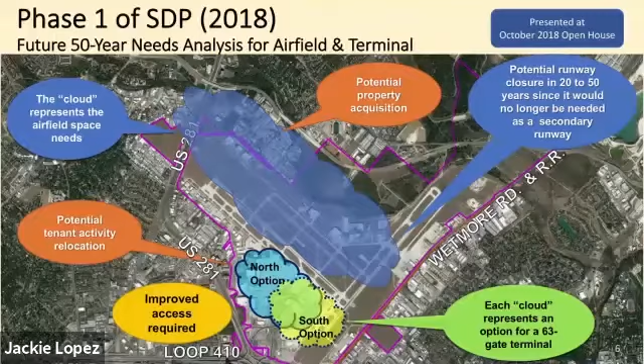And then in 2019, we said, okay, now let's focus on the existing airport and study it and see what do we need, what is reasonable, what is not exaggerated. So we call that phase two, because it was a contract amendment and it had a totally different focus. What's different about it is now we're looking at the most likely growth - this is a forecast scenario that FAA reviewed and approved. We also looked at a 20-year planning horizon, which is a little more foreseeable than 50 years, and also typical for airport master planning purposes. And instead of planning for facilities to come online early, we're looking at facilities when they're actually justified by demand, when they're needed. So those are some pretty dramatic changes.

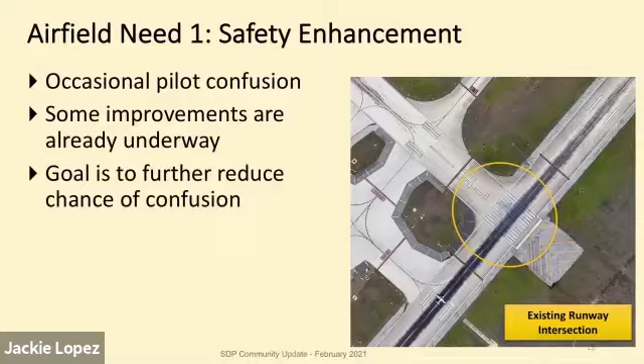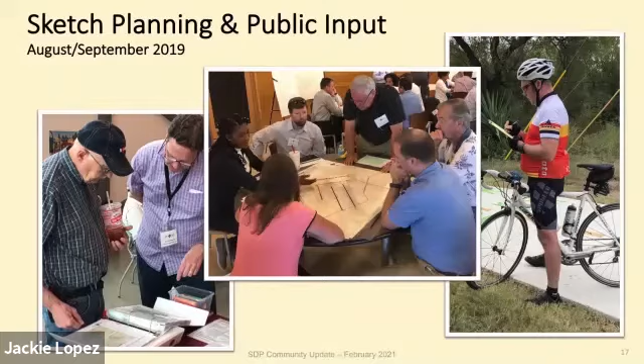For example, when something doesn't work at all, there's no need to figure out a cost estimate on it because it just won't work. We can eliminate it early on. So that's kind of the evolution of the process we went through.

On this next slide, you can see some of what we call fatal flaws, things used to eliminate alternatives early on before getting into more detail. For example, we're trying to make sure the airport can add capacity on the airfield or in the terminal area. If somebody drew up an alternative that reduced capacity or didn't add capacity, that wouldn't be useful. Also, if an alternative added runway intersections, that's not good from a capacity and safety perspective. FAA is very active in trying to eliminate runway intersections, not build new ones.

So these are some of the factors we used. I should mention another one: public parks. There were some folks who suggested runways entirely outside the existing property, in say a neighborhood or a nearby park. Those alternatives were flawed out in the early rounds.

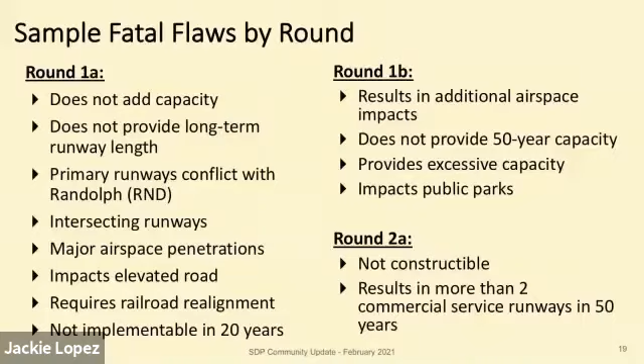On this next slide, you see a little bit more about some of these factors. Here's one we wanted to focus on. There were quite a few options suggested that took that crosswind runway 4-22, the northeast direction, and extended it, added a parallel, or otherwise made that the main direction of the airfield. The main direction today is the 13-31 direction you saw, which was more horizontal in most of our exhibits, and this would rotate it 90 degrees.

Why that's an issue is because of airspace. You'll see here in this arrow, we eliminated alternatives as we went. We actually had an exhibit that showed all the alternatives. It was hard to see because we had everything from runways off the property, as I mentioned, but also a circular runway in there, for example. So what you see here is from several rounds onward as we eliminated options. The options that rotated the entire airport in the northeast direction were eliminated.

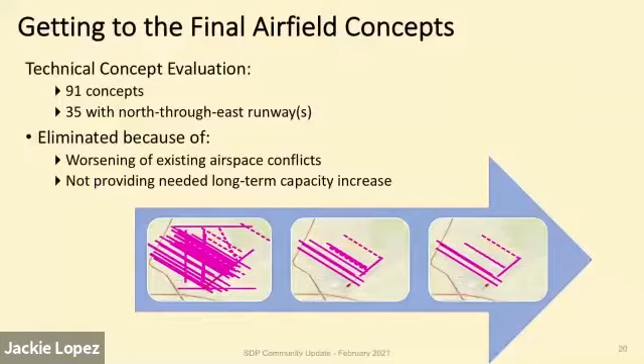And we know there's a lot of interest. People talked to us at the various open house events, pop-up open house events, and other meetings we had, and asked us why. So we really delved into that.

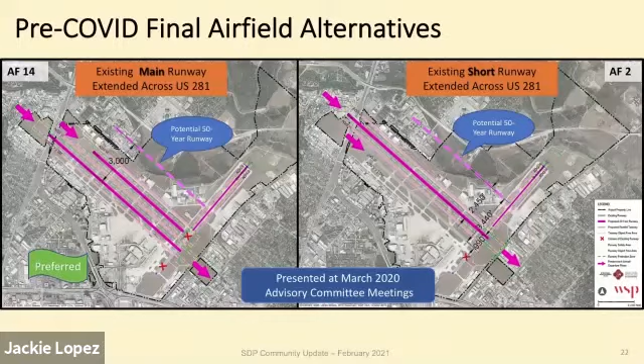So this is where we left off with you in March, and then of course COVID stopped everything. We were able to hold about four events, some pop-up open houses, coffee klatch meetings, and study advisory committee meetings. Then right before we were getting ready to go to our open house, everything came to a screeching halt. The whole study was paused in mid-March.

We restarted later in the year with the technical work, did a lot of rethinking and reassessing, and got underway again. That's why we have progress to report today.

The only other thing I want to mention about COVID is that we recognize aviation demand in the near term is, of course, dramatically different from what anybody would have thought a little more than a year ago. But we don't quite know yet what COVID's long-term impacts are. We know it may be different, but not exactly how. So for now, we're working with the existing forecast, and we realize it may be slightly high.

We'll reassess that in a few months and talk to the FAA about what to do. Do we stick with this forecast? Do we adjust it a few years but otherwise leave it be? Or do we rethink the entire outlook, redo the forecast, and tweak the planning to reflect that? We don't know yet, but we do know we may be slightly high with the forecast.

In planning terms, that's better than being low, because if demand is actually more aggressive than you thought, you're not ready for it. So we may be slightly high with our planning, and the things we're showing you may not be needed until a little later, but we'll know more in a few months when we reassess the forecast.

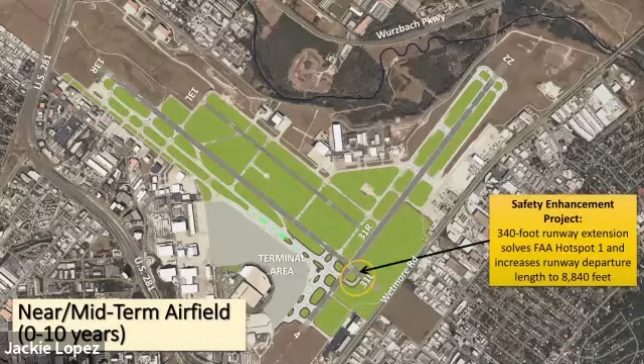It's been through a preliminary runway safety risk assessment, and this is one of the projects we're looking at. Looking a little farther out in the future, in the 10 to 20 year range, there are two projects. One is the biggest one here with the yellow oval. I'll just point out one other near the terminal area.

You see this angled taxiway coming off the runway towards where it says terminal area. That is a slightly reconfigured taxiway from what's there today. That should allow aircraft to get off the runway a little more quickly, which increases the runway's throughput, and that postpones the need for any other capacity improvements.

The bigger project, this one in the yellow oval, is a runway extension. It looks a little different from the one you saw in hot pink from where we left off in March, and the reason is that this fits nicely on the airport property. It's still an overall 10,000 foot long runway, which is what we showed you on that range chart for the aircraft going internationally.

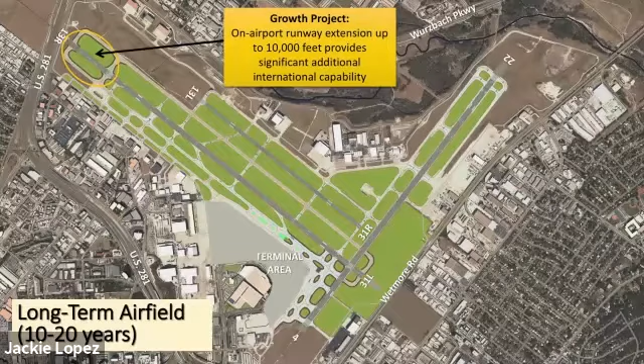And it very well gets you 10,000 feet on the property and doesn't interfere with 281. It's a big project, hard to see at this scale, so on this next slide we have a bit of a blow up of it.

I won't bore you with the engineering details, but suffice it to say that we did dig into this to understand the elevations there, any potential interference with 281, how close you can get to the edge there and have sufficient setbacks, and what that looks like. So what you see here is just a snapshot of some of that engineering detail.

Essentially, this would be on airport property. The runway would stop short of 281, and it would be at an elevation where, should in the 40 or 50 year time frame an extension be needed by future generations to go to future destinations with future airlines, you would have the option to extend it further if that were ever needed.

And of course, we've coordinated with TxDOT on this, and we've done quite a bit of engineering to understand what that would look like. But that's not part of the plan. This is part of the plan: that would be another 1,250 feet on this end. You saw the short extension on the other end. Together it makes for 10,000 feet.

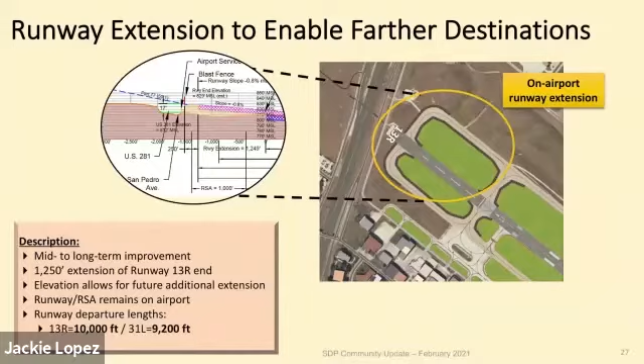So that was the airfield. We're not done with the terminals yet, but we did want to give you an update. So with terminals, let's also talk about the needs, the shortcomings a little bit.

On this slide, we did the same thing with terminals. There were lots of issues, and you can sort of combine them into three main categories. First, you have to accommodate passenger demand, and we deliberately looked at high growth demand, a little more aggressive than we actually think will happen. The reason for that is it's very disruptive to expand your terminal while it's in use.

That's just how it is at airports, so you try not to do that. You don't need to - that means you try to plan for a little more growth to make sure you're ready and that the things you build will last a while, so you don't have to come back a few years later and expand or redo things. That's why we looked at high growth demand.

We heard from many of you, we heard from the mayor's appointed Airport System Development Committee and others that a world-class customer experience is very important. That's what people want - Jesus has said that many times as well. That's what we're trying to accommodate.

The third need is about Terminal A. We also got comments about Terminal A. It's an older building, goes back to the 80s. It no longer meets the needs of today's aircraft and passengers. There's not enough space in it.

And also behind the wall, so to speak, are various systems like electrical and sewers and all that, which also are starting to reach the end of their useful life. So a major issue that we also knew we needed to fix.

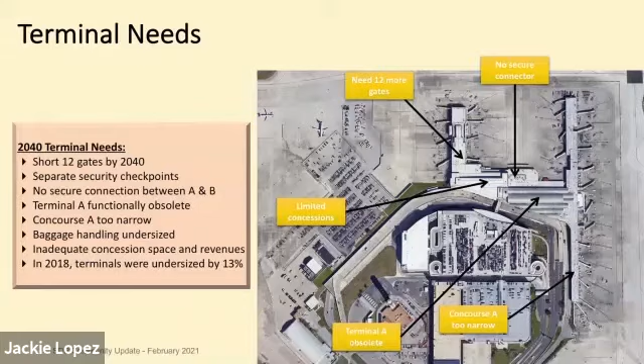When you look at today's planning standards and you were to provide this number of gates, you would build more space. You're undersized today already by about 13%. And of course, we're looking not at today, but at 2040. So when you look at 2040, we know that you need about 12 more gates and of course, more building square footage. On this next slide, these are clearly pre-COVID slides.

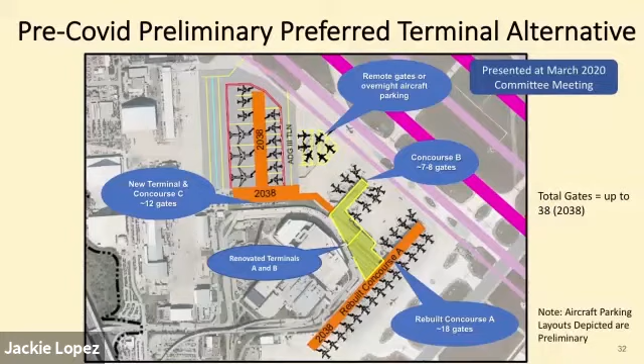So we're doing some more refinement now on, okay, what do we need? What does it look like? That general image, what exactly does the new terminal look like? This is some of the technical things we're doing. On the left there for reference, you see again, terminals A and B. And you can just see how narrow A is, especially on the southern part.

And what we're planning for, what we're trying to accommodate in all of our alternatives is a much more modern concourse width. The industry benchmark is 110 feet now for new concourses, quite a bit wider than what you have. If you have international service, that would widen it. So if you have international service on one side, it'd be about 120 feet. If you were to have gates and some alternatives on both sides of a concourse, it would need to be up to 140 feet wide. So quite a bit wider than what you have today. That's kind of some of the technical stuff we're doing.

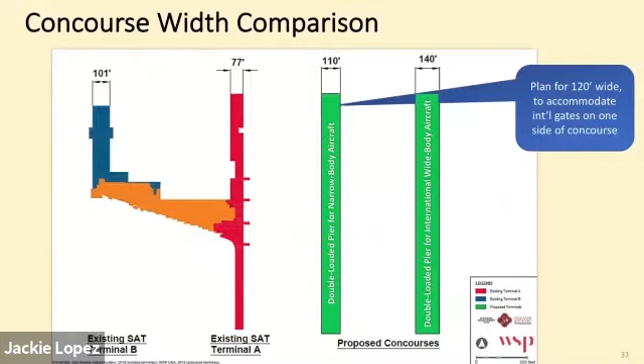We've seen a much stronger response than we normally see at airports. 3,600 people completed surveys that we did, and more than 700 people took the time to actually handwrite in additional comments.

We're continuing to collect this information, and that's one of our asks of you today. After this meeting, please go to the website, fill in what you'd like to see, send us a comment. We're continuing to collect this information, and that's all going into the terminal planning that's ongoing.

The current terminals, even a newer Terminal B, it's nice, but it's a little sterile. It's not really, doesn't really scream San Antonio. And people told us that loud and clear.

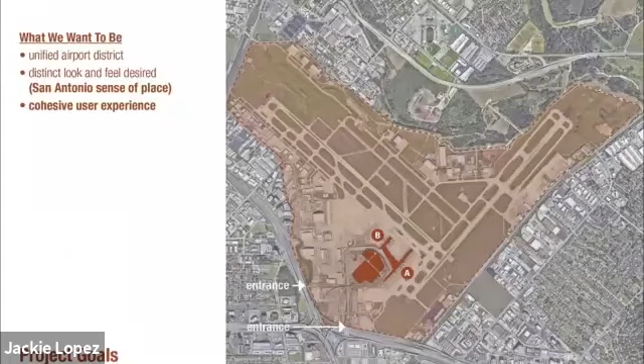Throughout the summer, we began to be able to take advantage of the pause for public engagement. We had a series of presentations to leadership of the airport, to city leadership, the Airport Advisory Commission, and to the mayor. And we are right now in the midst of the community outreach, which will continue into March. Following that effort, we will begin drafting the guidelines document, and the goal is to wrap that up in June of this year so that it can be implemented through the strategic development plan.

The process to date: we began with surveys, and what we found each time we've conducted a survey prior to the meetings and charrettes that you saw on the schedule before, we found very much consistency in the responses we received. Questions such as the main drivers of satisfaction were convenience, customer service, space, and ample amenities.

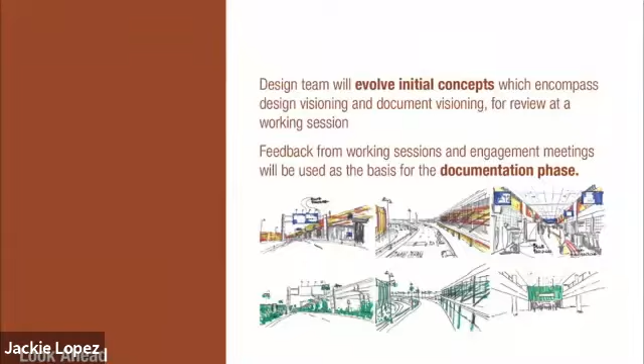It will culminate in production of what we call a book—however, being digital format, it will be available on the airport's website—and it will define the visioning and set the parameters for all the subsequent projects to come.

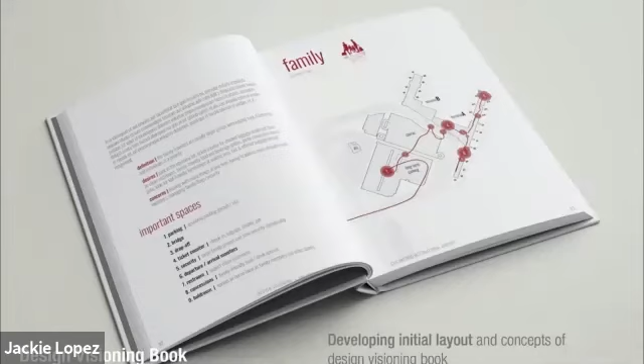And that wraps up the presentation component of the design guidelines piece. I think we're ready to move into the question and answer phase.